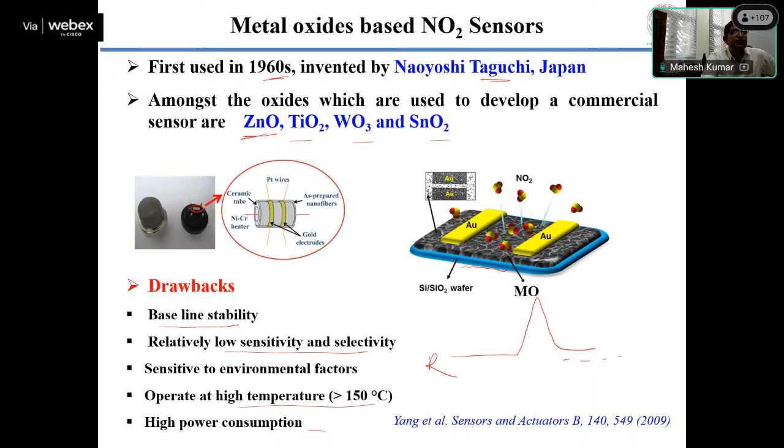Operating temperature is high. It is generally above 150 degrees centigrade. And because of this high temperature, the power consumption is very high. So how to overcome all these drawbacks, how we can use machine learning here, and then we can minimize all these negative points.

So first, I will try to explain what the sensing mechanism is. Why these particular few materials are selective towards a particular gas. So we can understand this. I think all of you know how a diode is working or how a PN junction is forming. So in the PN junction, we are taking the P-type and N-type semiconductor materials. In the P-type, your Fermi level is close to the valence band. Here, the Fermi level is close to the conduction band.

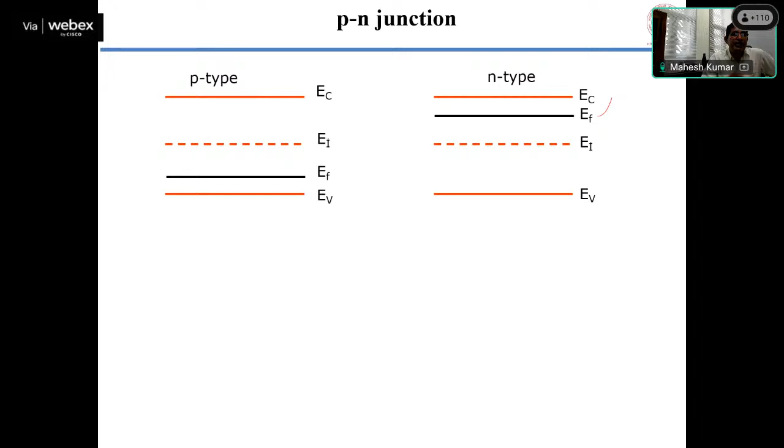And now, if you join both materials, what will happen? When we make contact of these materials, in the P-type materials, holes are majority carriers. Here, electrons are majority carriers. So these carriers will start moving from higher concentration to lower concentration. So holes will move from P-type to N-type, and electrons will diffuse from N-type to P-type.

And this is at t equal to 0 time. When we go to higher time, t equal to t1, particularly in this region, these electrons and holes are depleted, and they are leaving behind the immobile ions. So positive means these are the ions here. So electrons diffused from N-type to P-type, and are leaving behind the immobile charges. So in the steady state, what we will get is the electric field, and now this electric field is there.

This will basically stop the further diffusion of electrons from N-type to P-type and holes from P-type to N-type. Because of the concentration, holes will move in this direction, but because of the electric field here, the holes will go back. So we call this the steady state. In this region, the free carriers, electrons and holes, are both depleted.

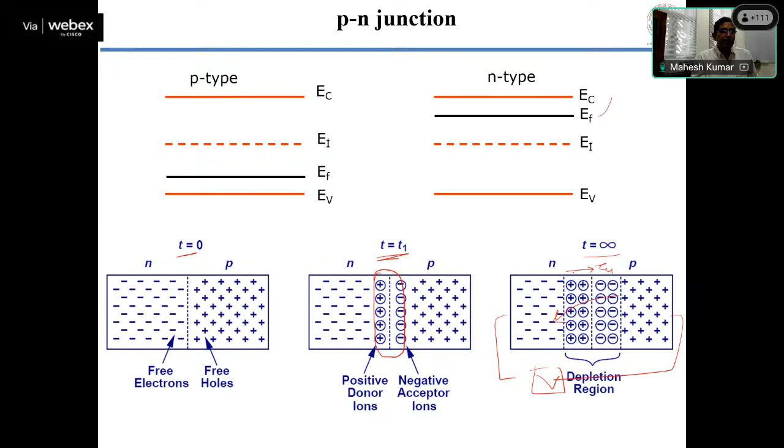To understand the gas sensor performance, we can use the same working principle and explain how gas sensors work. Suppose we consider a semiconductor material, an N-type semiconductor. If we make the contact from top and bottom on this N-type material, how much will be the resistance by Ohm's law?

We can calculate it. We know R equals rho L upon A. L is the length between both electrodes. A is the contact area, top and bottom. Using this, we can calculate. Suppose we are not changing the doping, so rho, the resistivity, is the material property.

If we want to increase the resistance, because the material property is constant, we can increase L, or by playing with the length and the contact area as per our requirement, we can tune the resistance. This is simple Ohm's law. Using this concept, if resistivity is known, we can calculate how much the resistance is.

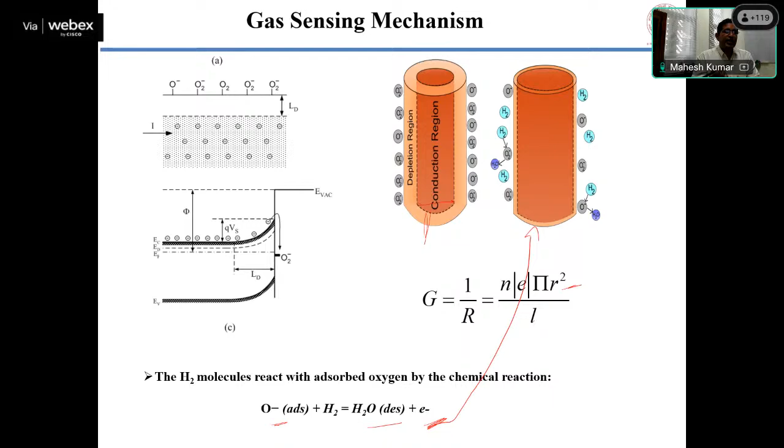So your conductivity depends on how the conduction channel is modulating. If the diameter is higher, conductivity is higher; if the diameter is less, conductivity is lower. Accordingly, we can monitor how many molecules are coming. Because we have oxygen in the environment, the material is already adsorbing oxygen molecules, which take electrons from the material and make the depletion region. But when this reaction happens, the electrons are given back to the semiconductor, and there is a change in the resistance. We can monitor this change and make these gas sensors.

So this is the conventional approach, where we are measuring the resistance and then monitoring what percentage of this particular gas is there. In the conventional approach, when we expose the sensor, the resistance changes. Once we remove the gas, our sensor should come back to the initial state. But practically this is not happening.

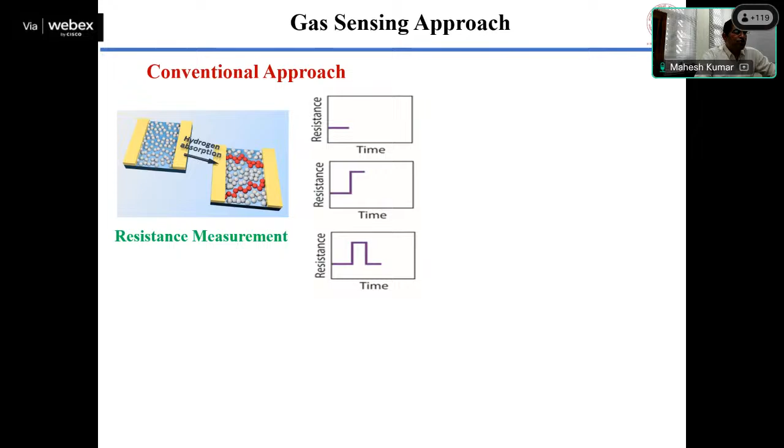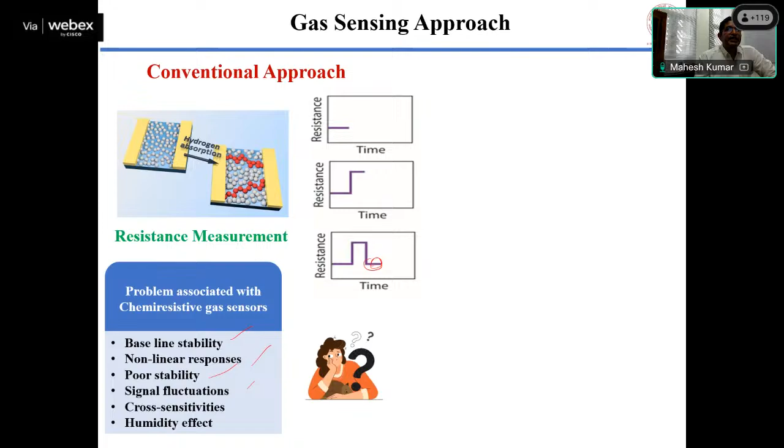So in the conventional approach, the issue is that the baseline does not come back to the initial state: there are issues of baseline stability, non-linear responses, poor stability, signal fluctuation, cross-sensitivity, and humidity. These are the drawbacks, and we are not getting the actual concentration in the environment. So we have taken a new approach, where we measure the impedance plus apply machine learning. Using this, we can overcome baseline stability and other drawbacks. We get a linear response, broad dynamic range, baseline stability, and minimal effect of environmental factors.

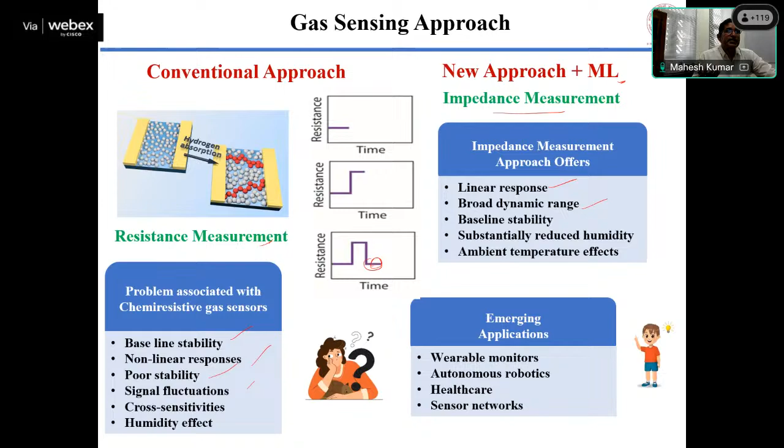So what is this new approach where we are measuring the impedance? Conventionally we measure only the resistance, not the impedance. Impedance means we also measure how much capacitance and how much resistance there is at different frequencies. We do these measurements, then apply the machine learning algorithm considering all these parameters, and we get better results compared to resistance. So first we try to understand what impedance is, and why we need to measure it, if we can get data from the resistance.

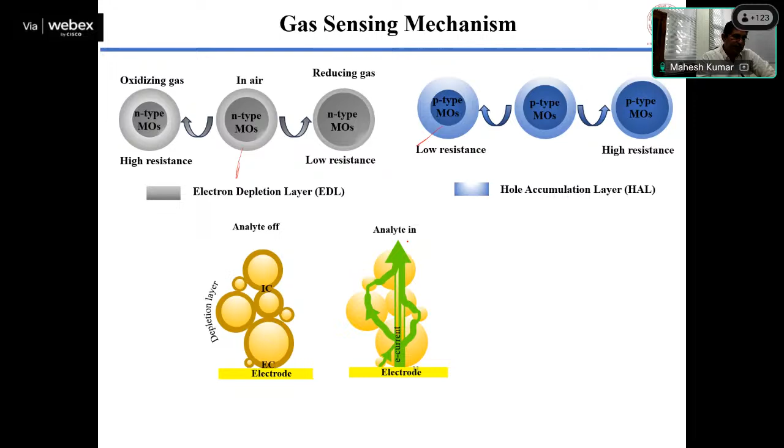Now, from this diagram you can understand basically how the electron flow is here. The electron flow depends on the shortest path, and then we get the current flow. So this is our current flow here. Now here there are two important parameters.

One, as I said, is that RC is the contact resistance, RG is basically from the material. Another one is coming from the bulk resistance. So this is the bulk resistance. This is from the grain, your interconnect here, and another one is your contact resistance. So when we are doing resistance measurement, we are measuring only resistance, and we are ignoring basically the capacitance. That capacitance is coming either from the contact electrode or from your grains.

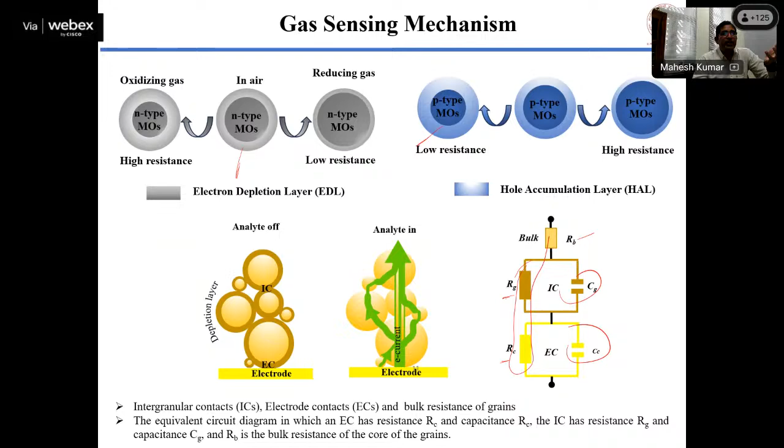But in the impedance measurements, we are considering all the factors. We are measuring resistance, and we are measuring capacitance also, because impedance gives the overall effect of capacitance and resistance. How to measure this? Resistance is simple. We can apply a constant voltage and current and calculate the ratio.

But to measure impedance, where either capacitance or inductance is there, we require the AC signal. And here one more parameter is coming, that is the phase. How much phase difference is there between your current and voltage? Is it leading, or is it behind, depending on which component we are using. So mainly our focus is only on the capacitance, because we don't have inductance here. And your capacitance, inductance or impedance also depends on the signal or measurement frequency we are using.

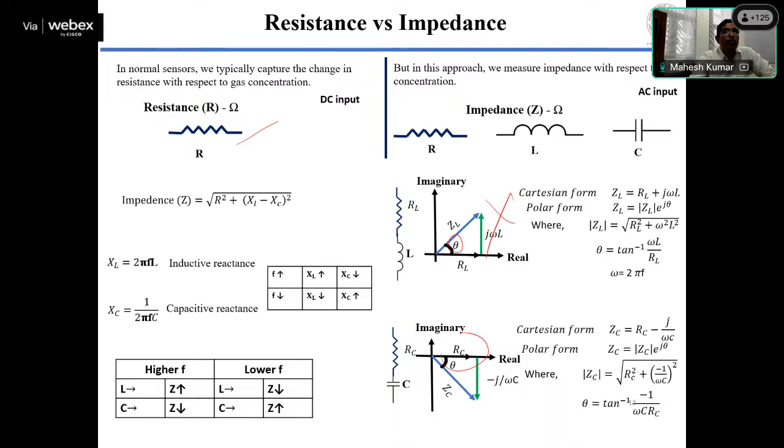So what we have done is measurement at different frequencies, and then we collected the data, and all this data we put into machine learning, and then our output is closer to the actual values as compared to the resistance. How to measure this? This is the simple resistance measurement. We can apply a constant voltage, measure the current, and then from the ratio we can calculate the component resistance. This is applying your DC bias. If you are applying AC, similarly we can calculate it.

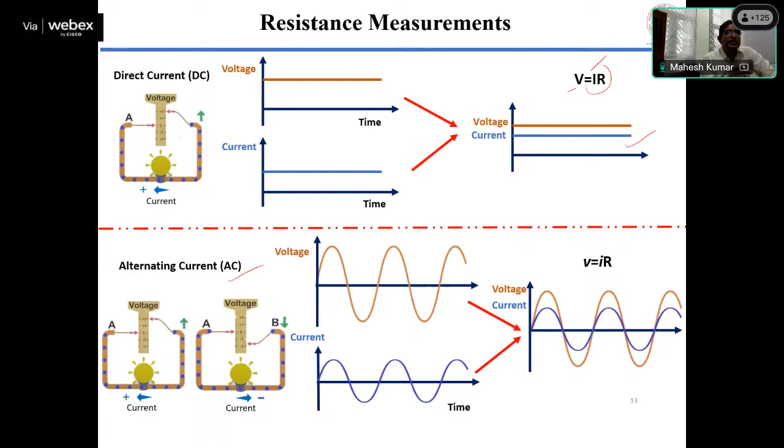But in the resistance, both current and voltage are in the same phase. There is no change in the phase. But when we consider the capacitance, the phase is also coming. In the capacitance, your current and voltage are not in the same phase; there is a delay. And we have also considered how this phase changes in the presence of gas and in the absence of the gas. So here there is one more parameter: the capacitive reactance.

Otherwise, in the resistance we can apply the DC bias, and from DC we can calculate how much change there is in the resistance. But in the capacitance, one is frequency: we can vary the frequency. Another, we can also measure how much change there is in the phase, and that also we can relate with the sensing. We grew different types of metal oxides here. So this is one example for H2S.

We have deposited the tin oxide, and what we found basically is that tin oxide is giving good sensitivity towards H2S, but it is not selective. So then we have deposited some copper oxide, decorated, and copper oxide has another problem. If you are using pure copper oxide, because H2S is there and we are doing the measurement at 150 degrees centigrade, copper oxide converts to copper sulfide, and copper sulfide is highly conducting, so it does not give any sensing towards H2S. So that is the issue.

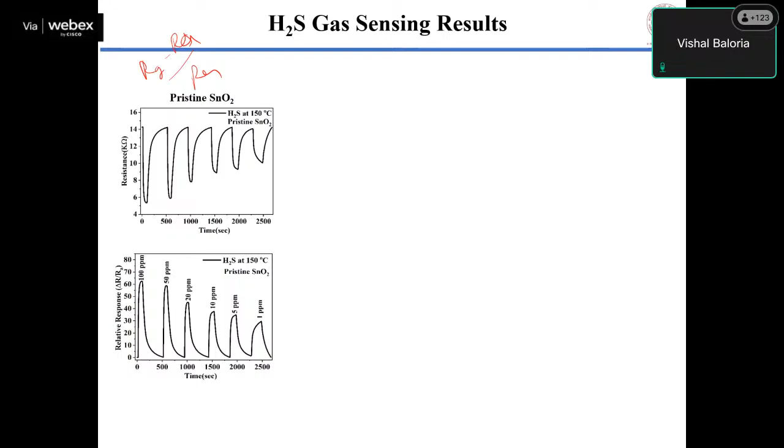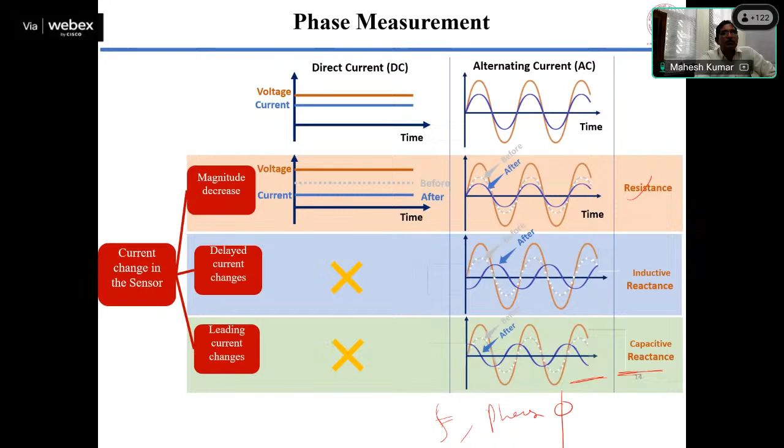Yes, Vishal, you can ask. You can unmute and ask if you have any doubt. Sorry, Mahesh sir. In the last slide, in the impedance measurement, what is before and after? Is it before exposure and after exposure? Which one? The previous slide, where you mentioned impedance. Yes, I will come to this one. It depends on the capacitance. This is simply how we measure the capacitance; on the sensor this is not measured. I will come to it. Basically, what is the phase?

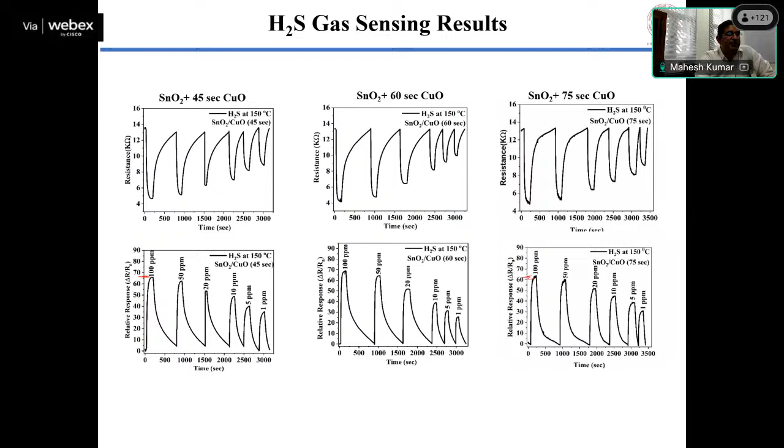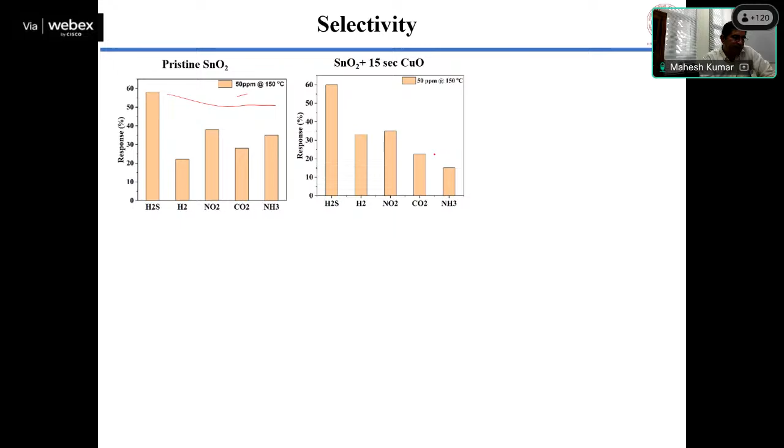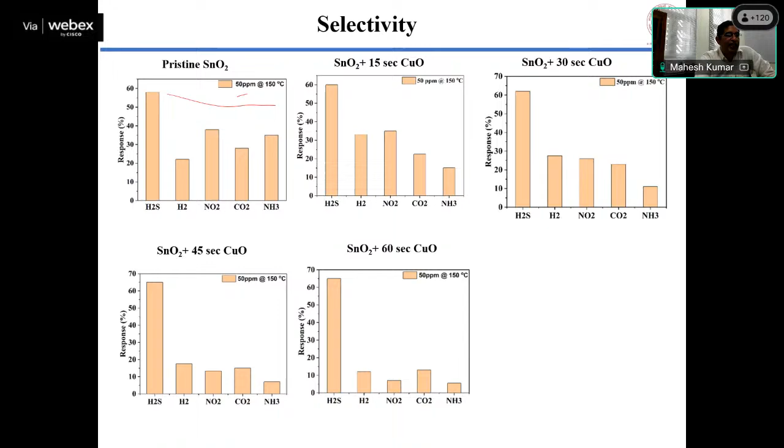But more than this, if you check the selectivity, this sensor is not selective, because with ammonia at 50 ppm there is not much change. After 15-second decoration there is some improvement, but not great. Again the response increases from 58 to 62. And finally, at 60 seconds, these are below 10 and this is close to 70%, 65%. So just by decorating some metal particles or copper oxide, we can improve the sensor selectivity.

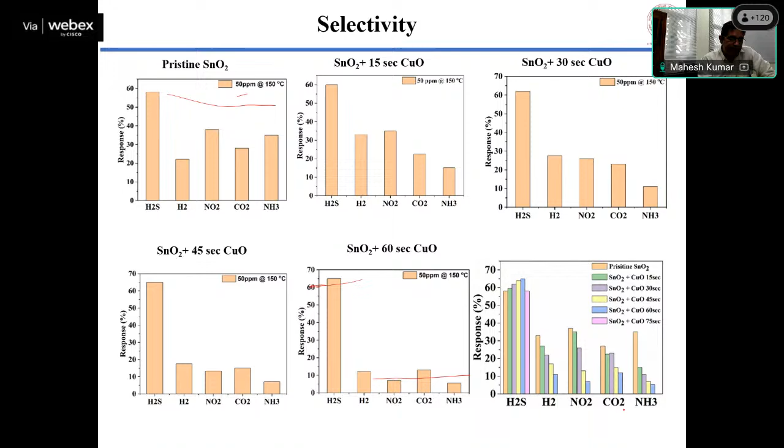So here we can improve, basically; here you can see all of this together. Particularly, the 60-second decoration is giving the highest sensitivity.

Now, another question: why have we not used only copper oxide? Because you can see it is switching from copper oxide to copper sulfide, and now the conductivity is very high. So there is almost negligible change in the current when we use different ppm. That is the reason: copper oxide reacts with H2S, making copper sulfide and H2O. Because of this, we have not used it.

We have explored many materials. I will not go through all of them, but I will take one. This is copper chromium oxide, which is giving a very good response. And then again, we have decorated it with Pd. So here you see how the resistance is decreasing; that is obvious in a semiconductor: when we increase the temperature, resistance decreases.

This is the sensing response, and the issue here is the baseline stability. Also, this depends on the decoration. But we got the maximum here. I think at 9 seconds we got the maximum change. So basically, we got the maximum change.

Then we have done the material characterizations, XPS and XRD, and we have confirmed that there is Pd decoration. Some oxide is forming, and some pure Pd is there. We do the decoration for only 9 seconds, and the thickness is around 200 nanometers.

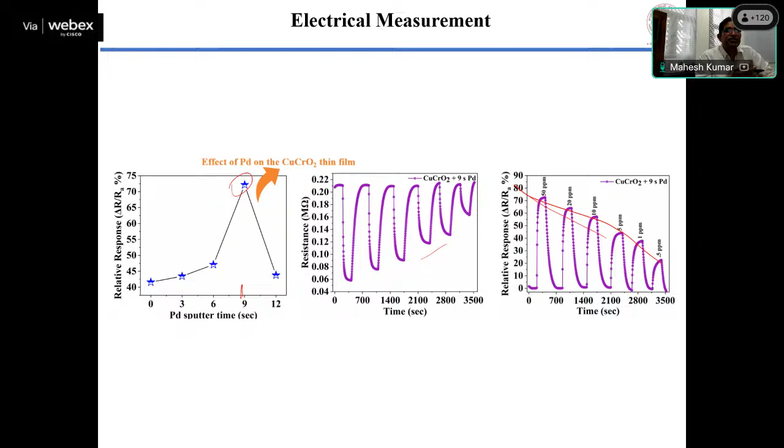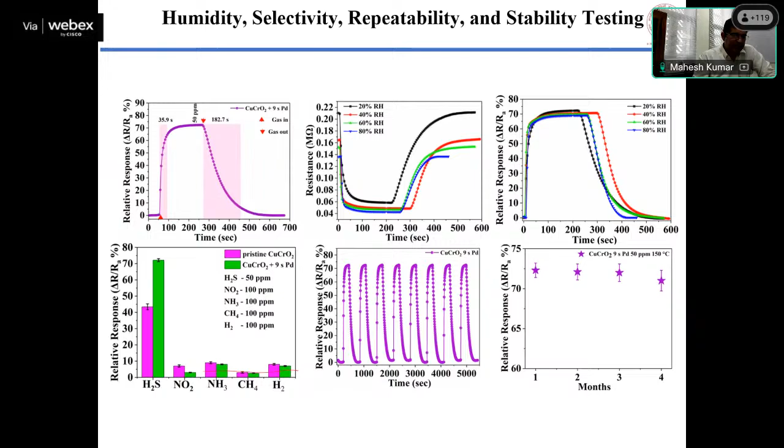These are the other parameters, selectivity: it is highly selective. The response time is around 35 seconds. But if you want to use it a second time, we have to wait 3 minutes, around 180 seconds. In gas sensors, this is acceptable. And these are the other performance parameters, in humidity.

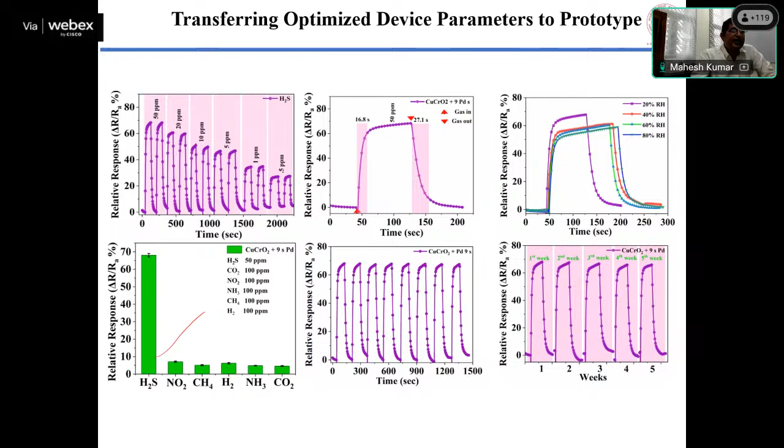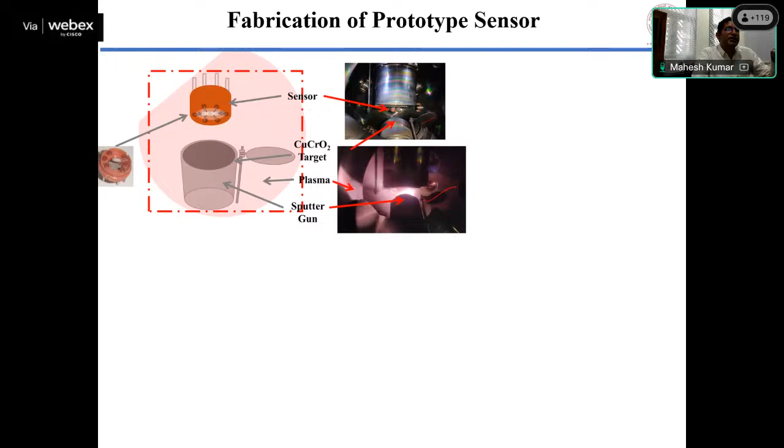Next, we transferred this onto a prototype on an alumina tube, performed all these measurements, and found it is highly selective towards H2S. So for this transformation in the sputtering, we use this alumina tube and then do the deposition. Whatever thickness we optimized on SiO2, we use the same thickness here. All other parameters are the same.

So you can see here we are depositing this material, copper chromium oxide, and then we check the heater. We keep the temperature around 150 C. With this buck-boost converter, we apply a constant voltage to the heater. This is our sensing setup, a very small setup, and this is the impedance circuit, by which we can record the impedance.

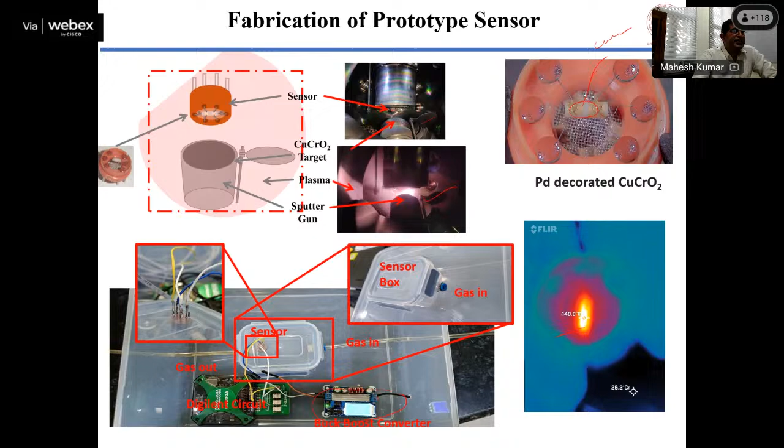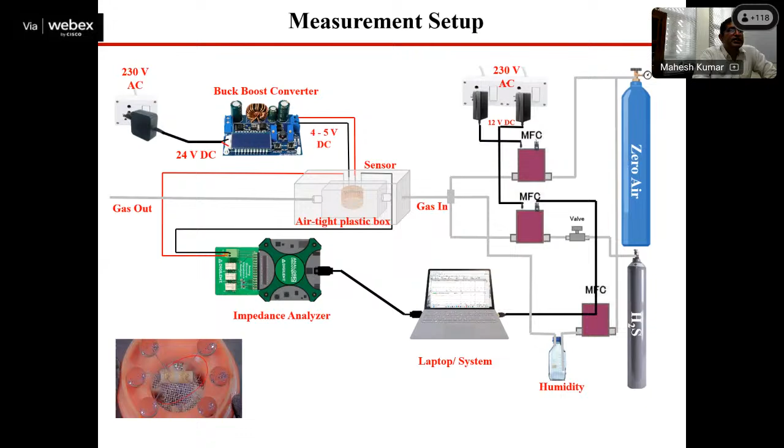These are two airtight boxes. From this side the gas comes in, here is our sensor, and then the gas goes out, and here we measure the impedance. This schematic diagram is the same as what I showed. This is after deposition. Here we have the cylinders; by MFC we control the flow of the different gases, and then we measure the impedance. Here the impedance is a function of frequency, also depending on the different ppm.

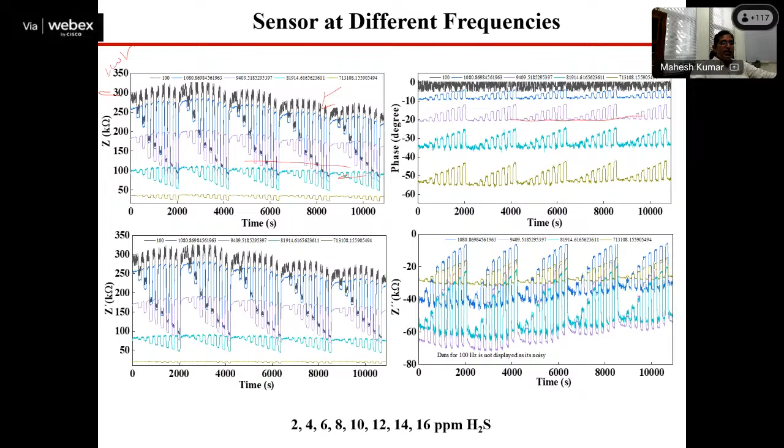But if we are going higher, around 10K, our baseline is stable. In this case the baseline is almost stable. So if you measure at 10K frequency, we are getting stable data here. And the phase is stable even at lower frequency. This is giving a more accurate value than the resistance. So all of these parameters we have measured, and then we have used them in machine learning.

So here we are using an artificial neural network. We put all these parameters, frequency, humidity, phase, as an input, and our output is the prediction of exactly how much H2S is there. We have taken data collected at 0 and 20% of humidity for the training, and this data was divided 80 and 20 for training and testing. So 80% of the data we used for training and 20% for testing. The well-trained model was then used for the prediction.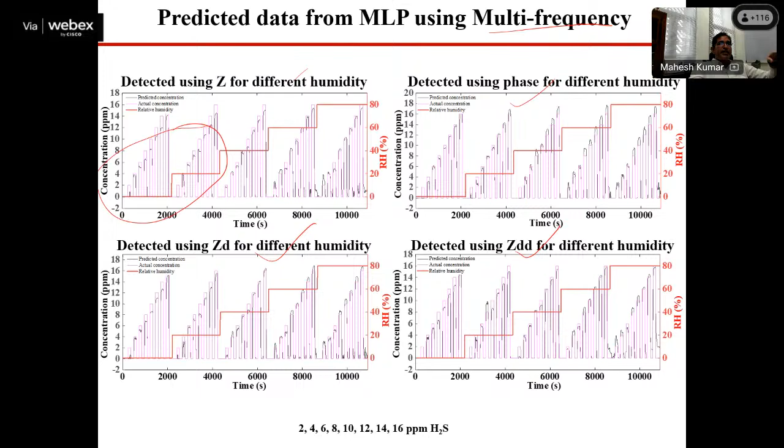All these we are putting in the NN model, and we are optimizing these data. So here you can see the 40% RH environment. This is the phase. This is the other impedance parameter.

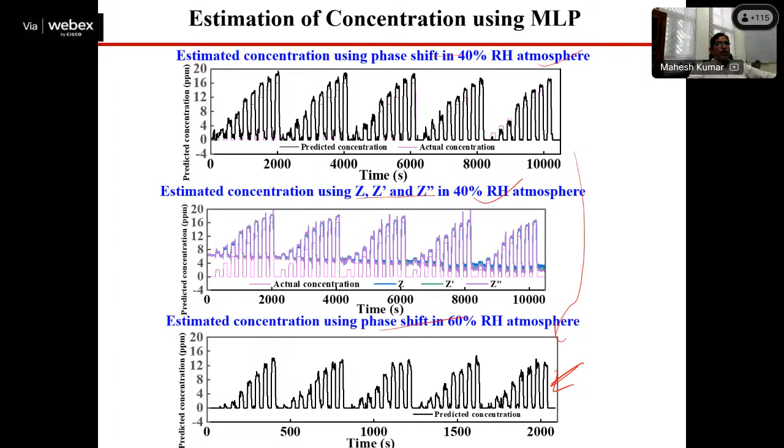Here is the phase. As compared to the others, phase is giving a more accurate value of how it is changing in the different concentrations. This is giving a more accurate value as compared to the other parameters. But if we consider all parameters and put them in the NN model, we are getting closer to the actual values.

Another important sensor performance parameter is how much cross selectivity there is. So we have used H2S mixed with NO2, ammonia, methane, because in the sewer lines these other gases are generally available, or particularly the combination is there. And now we have done the phase shift, and with phase shift we got closer values.